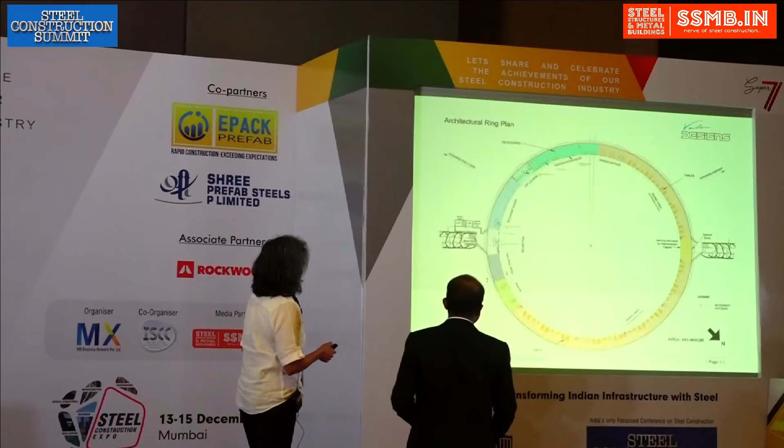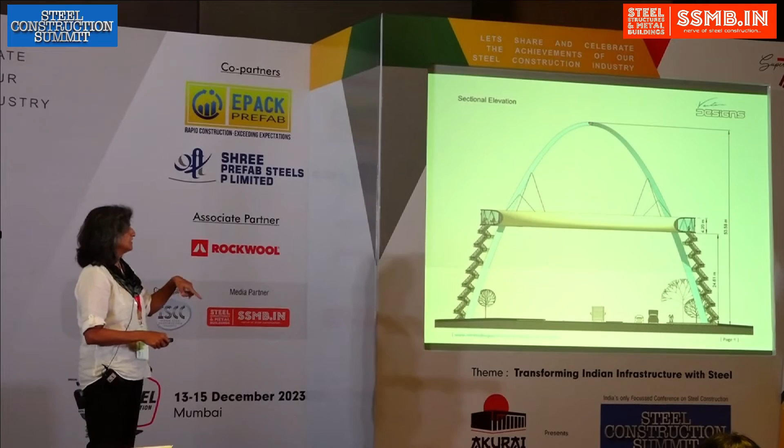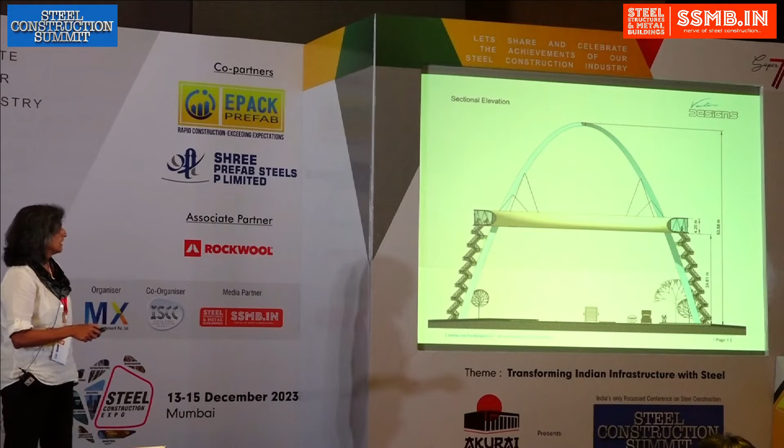So here what you see is there are these four arches and a suspended bridge on that, and the total height is around 55 meters. This ring diameter is around 60, and at the base the arches span around 100 meters. This deck area is like a 4.5 meter bridge.

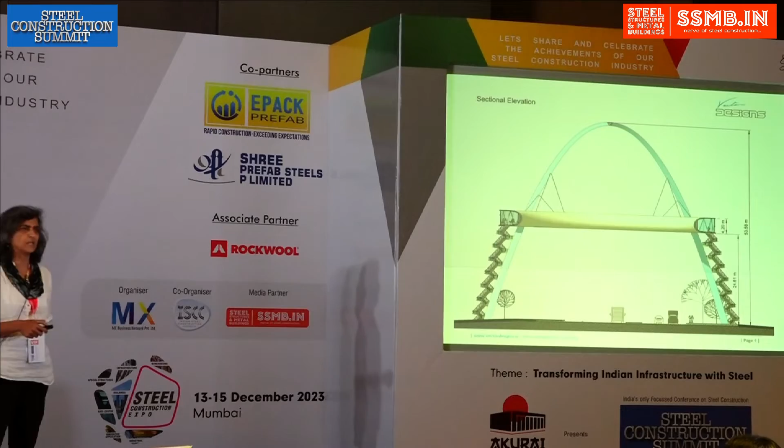Initially it was just a bridge connecting those two sculptural arches, but then later on it evolved, as we and the client started working together, and you'll see what it turned out to be later.

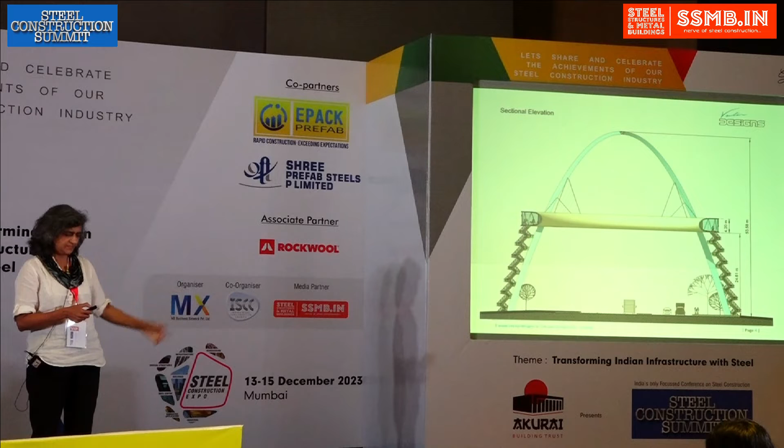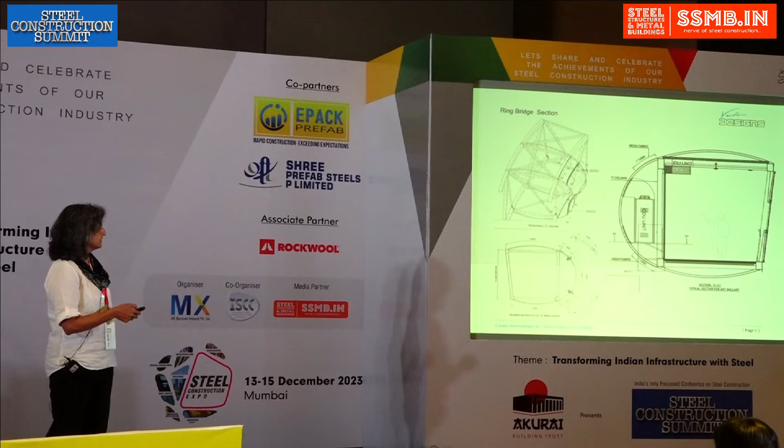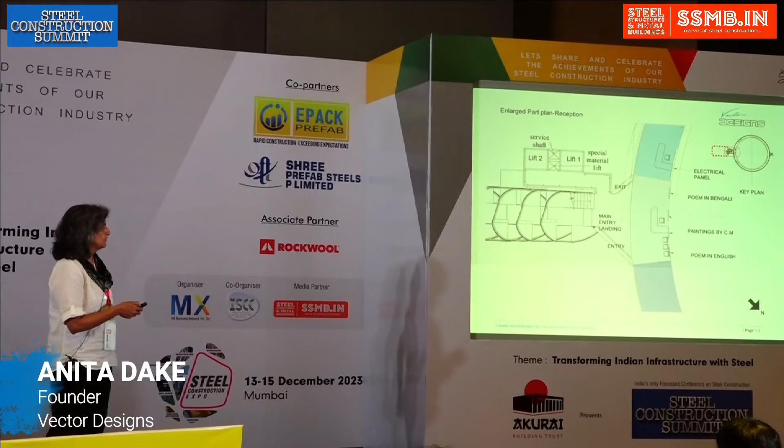So this is the basic floor plan. It has two staircases, and this is the detail - there are two lifts and also a dumbwaiter for the restaurant to carry food, because we couldn't keep the kitchen on the upper floor, so the kitchen is based at the ground.

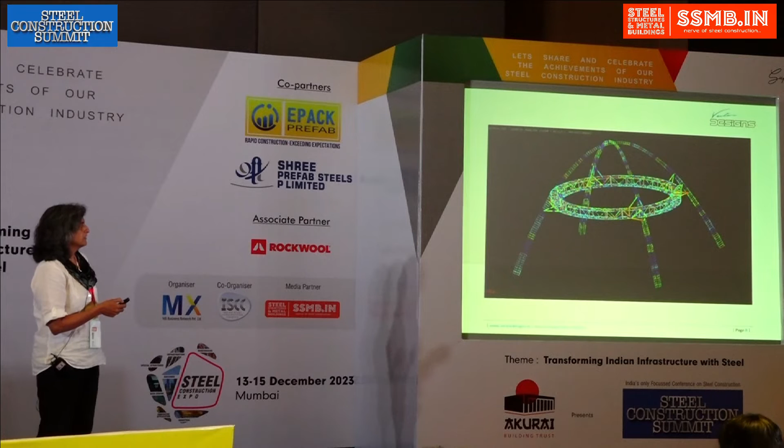So this is the engineering analysis that was done, and then I'll also walk you through the construction sequence that we had.

So HIDCO offered us one small plot next to the main plot, and the plot is actually at the crossroads of two arterial roads, and along that plot we developed this.

We got small pieces of these arches from our workshop, and they were welded together, and each section was hoisted up and held in place, section by section. There was engineering involved in the construction sequence also, to stabilize the structure during erection, and it was very risky for us. But luckily, being a prefabricated structure, we could manage it during night times without hampering the heavily plying vehicles on those arterial roads.

This was the central mast which was holding up the arches, and once they got stable, we could get rid of it. After putting up the arches, we also had to put the bridge so it could span well, and this is how it was done in segments - the whole thing was assembled on ground and then lifted up.